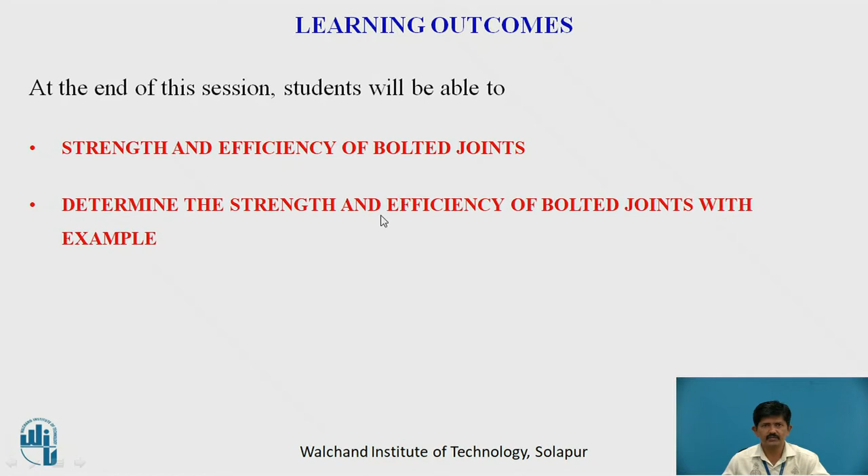Today I am here to explain to you about the strength and efficiency of bolted joints in the steel structure. The learning outcomes of today's lecture: the students will be able to understand the strength and efficiency of the bolted joint, and they will be able to determine the strength and efficiency of the bolted joint with an example.

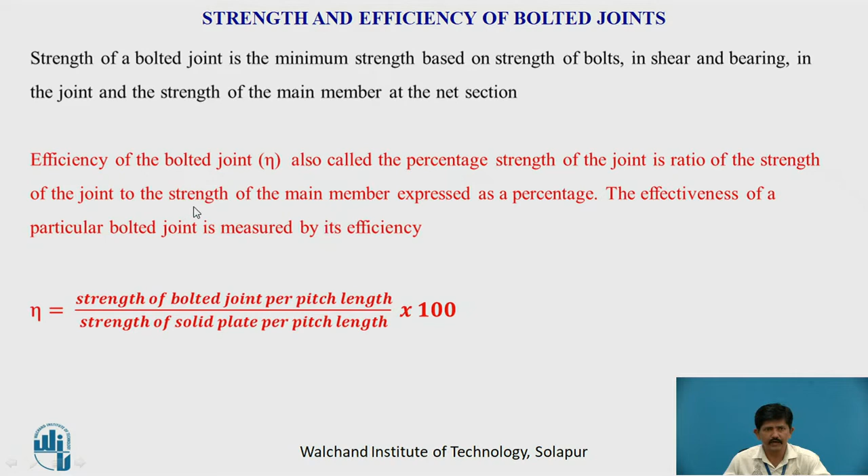The strength of bolted joint is the minimum strength based on the strength of bolts in shearing and in bearing and the joint and the strength of the main member at the net section. Efficiency of the bolted joint, also called the percentage strength of the joint, is the ratio of the strength of the joint to the strength of the main member expressed as percentage.

Here we will see an example to calculate the efficiency of a bolted joint. A single bolted double cover butt joint is used to connect two plates which are 8 mm thick, assuming 16 mm diameter bolts of grade 4.6 and cover plates to be 6 mm thick. Calculate the strength and efficiency of the joint if 4 bolts are provided in a bolt line at a pitch of 45 mm. So this pitch, center to center distance of the bolts, is 45 mm as shown in figure.

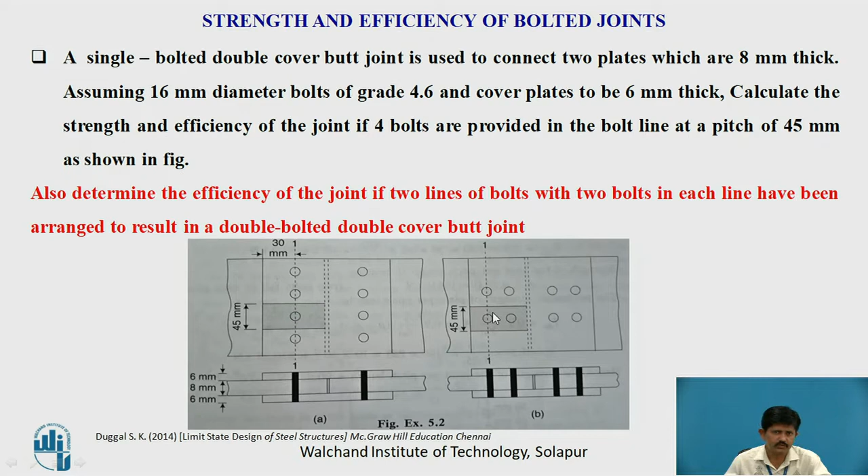Also determine the efficiency of the joint if two lines of bolts with 2 bolts in each line have been arranged to result in a double bolted double cover butt joint. Here the arrangement is a little different. There are 2 lines of bolts with 2 bolts in each line, so here line 1 and line 2.

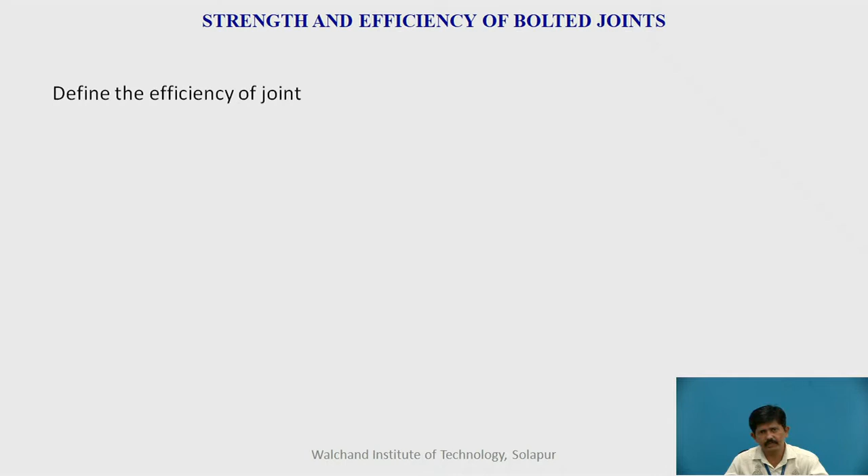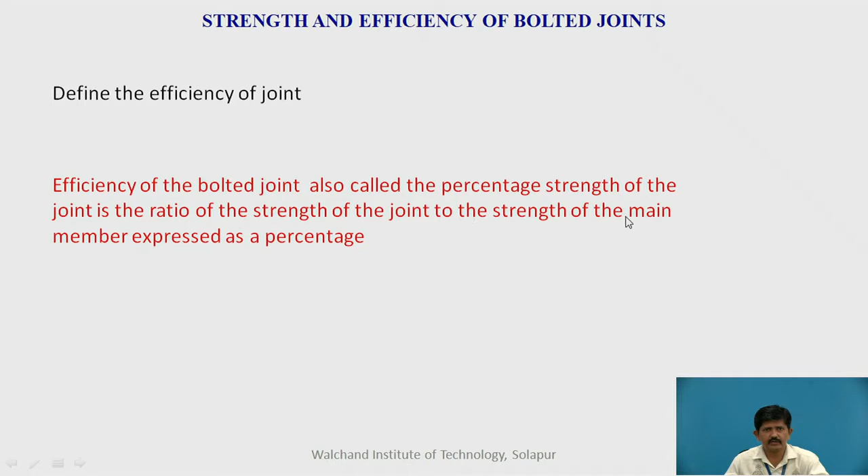Define the efficiency of the joint. Pause the video and try to write the answer on a paper. Efficiency of the bolted joint, also called the percentage strength of the joint, is the ratio of strength of the joint to the strength of the main member expressed as percentage.

Now going to that problem, what is given? Fe 410 grade of steel is given, so fu for that is 410 MPa. This has to be taken from IS 800 2007 table number 1 on page number 14. And for bolts of grade 4.6, fub, that is the ultimate strength of bolt, is 400 MPa, taken from IS 1367 part 3 2002 table number 3 on page number 6.

And for 16 mm diameter bolt, the net area of a bolt is 157 mm square, again taken from IS 1367 part 3 2002 table number 6 page 9. If you are not referring to this IS code, you can take A net for the bolt at the root of the thread, that is 0.78 times pi by 4 d square.

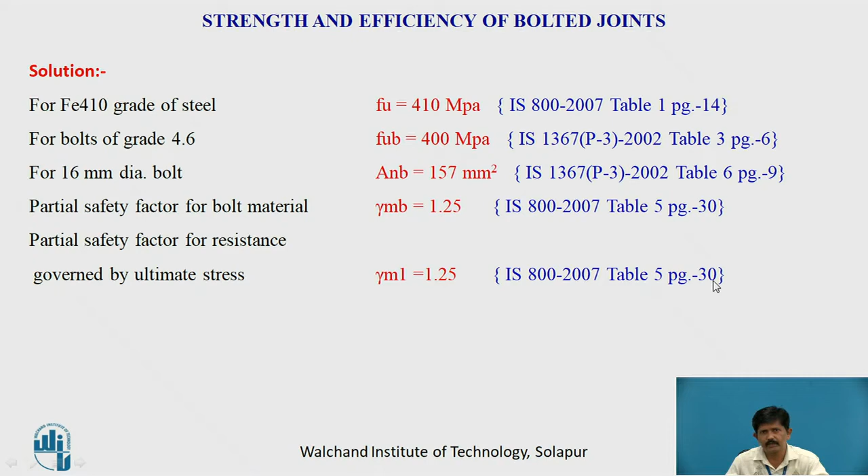Then the partial safety factor for bolt material gamma mb is 1.25, taken from IS 800 2007 table number 5 on page number 30. Then the partial safety factor for resistance governed by ultimate stress gamma m1 is equal to 1.25, again taken from IS 800 2007 table number 5 page 30. The bolts will be in double shear and in bearing.

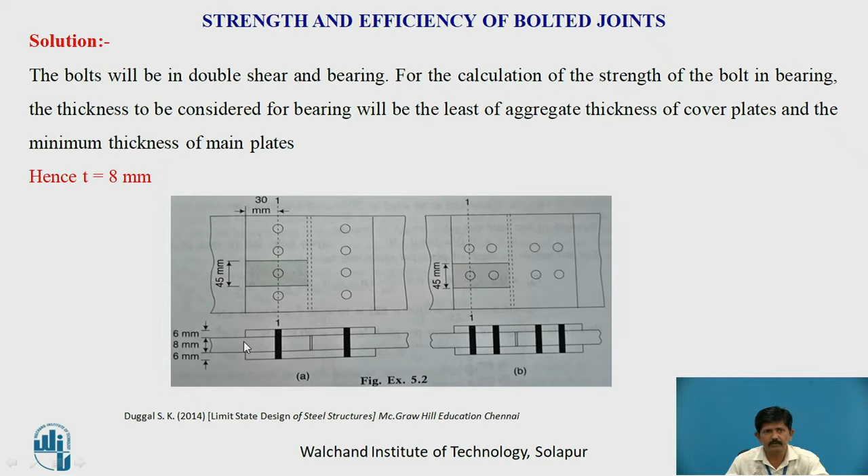For the calculation of the strength of the bolts in bearing, the thickness to be considered will be the least of the aggregate thickness of cover plates and the minimum thickness of main plate. So when you are considering bearing, you have to add the total thickness of the cover plates, that is 6 plus 6, 12, or the main plate thickness 8 mm. Whichever is minimum, you have to consider. So we have considered here 8 mm thick.

Now first of all we will calculate the strength of bolt in shearing per pitch length. So here Vdsb is equal to twice into Anb into fub upon under root 3 into gamma mb. This is taken as per IS 800 2007 clause number 10.3.3 on page number 75.

Actually in the IS code these two different formulas are given: Vdsb is equal to Vnsb upon gamma mb, and Vnsb is equal to fub upon under root 3 into bracket nn into Anb plus ns into Asb. Here nn is the number of bolts in the threaded portion, and Anb is the net area of the bolts in the threaded portion, ns is the number of bolts in the shank portion, and Asb is the area of bolt in the shank portion.

As our case has the joints in the threaded portion, we are neglecting this ns into Asb term, and as it is in the state of double shear, we have to multiply this by 2. So Vdsb is equal to twice into area, that is 157, into 400 upon under root 3 into 1.25, into 10 raised to minus 3 to convert Newton into kilonewton.

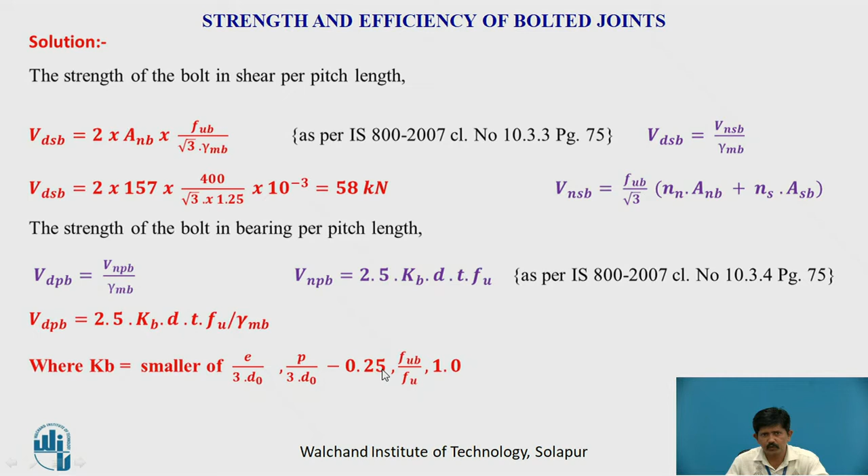So again KB is equals to minimum of these values: E upon 3 times D0, and P upon 3 times D0 minus 0.25, or FUB upon FU, or 1. So first of all we will calculate the KB value, that is minimum of all this. E is the end distance divided by 3 times D0, that is the diameter of bolt hole. 16 mm is the diameter of bolt, so 18 mm will be the diameter of bolt hole as per

IS 800 2007. So this first value comes out to be 0.55, then second value P upon 3 times D0 minus 0.25, so pitch is 45, then 3 times diameter of bolt hole minus 0.25, it comes out to be 0.58. Then FUB is the ultimate strength of bolt divided by ultimate strength of plate, that is 400 divided by 410, it is 0.975, and 1. So out of this minimum is 0.55, the KB value is 0.55.

So we have to calculate now VDPB, that is 2.5 times KB into D into T into FU upon gamma MB. So here it is 2.5 times KB is 0.55, D is the diameter of bolt and T is the thickness of main plate, then FU is the ultimate strength of plate 410 divided by gamma MB is 1.25. So this comes out to be 57.73 kilonewton.

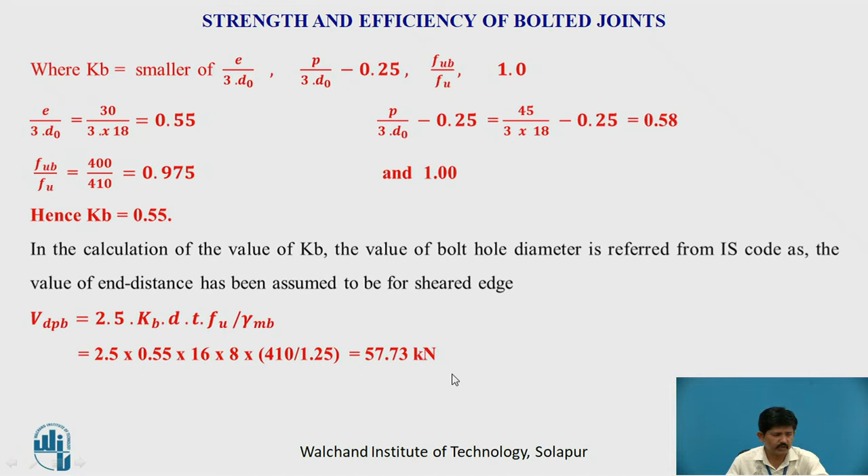So the net strength of plate per pitch length, TDN is again 0.9 AN FU upon gamma M1. It is again as per IS 800 2007 clause number 6.3.1 on page 32. So here we have to find out this net area for this pitch. Only one bolt hole is there in this pitch area. So 0.9 FU into P minus diameter of bolt hole into T upon gamma M1. So this comes out to be 63.76 kilonewton.

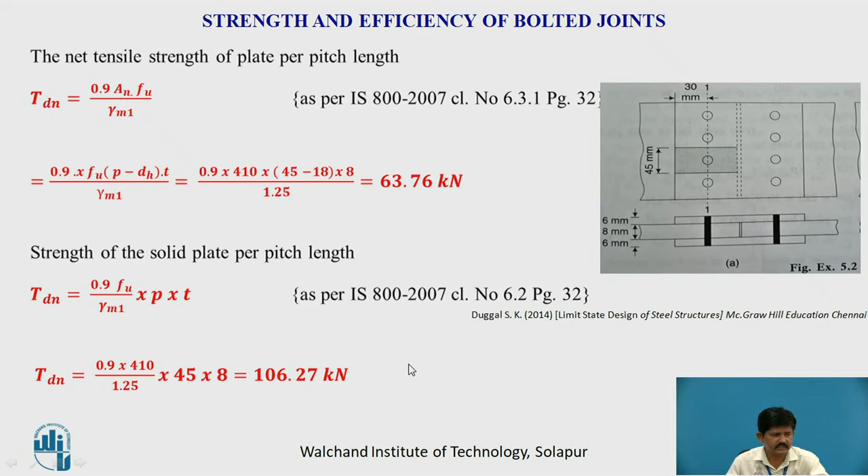Now strength of a solid plate per pitch length. So without having the bolt hole, what will be the strength of plate? Again it is 0.9 FU upon gamma M1 into P into T. So here without bolt hole it is pitch into thickness. So this TDN comes out to be 106.27. Hence, the strength of the joint per pitch will be least of this, that is 57.73, and the strength of the solid plate is 106.27. Therefore, the efficiency is 57.73 divided by 106.27 into 100, it works out to be 54.32%.

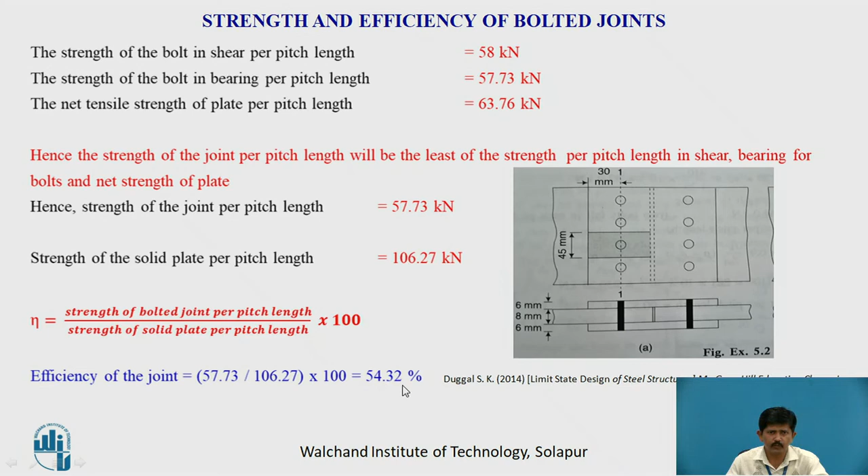Now, when the bolts are arranged in two rows, the strength of the joint per pitch on the basis of the strength of bolt in shear per pitch. So here two bolts are there, so you have to multiply that shear strength per pitch into 2. So 2 into 58, it is 116 kilonewton. Then strength of bolt in bearing per pitch. Again, in bearing you are having 2 bolts, so you have to multiply by 2 whatever value we have got earlier for single bolt. So 2 into 57.73, it is 115.46 kilonewton.

And the net tensile strength of the plate per pitch length. So here only section 1 will be considered. Again you are having only one bolt here. So when one bolt will fail, then only this goes to the other part, and that will also fail at the same strength. So here we do not have to multiply it by 2. So it will be 63.76 kilonewton.

So therefore, the strength of the joint will be least of all these three, that is 63.76 kilonewton, and the strength of the solid plate per pitch length will be same, that is 106.27 kilonewton. So the efficiency of the joint is 63.76 divided by 106.27 into 100, that comes out to be 59.99%. So arranging the bolts in this fashion has more efficiency than the earlier one.